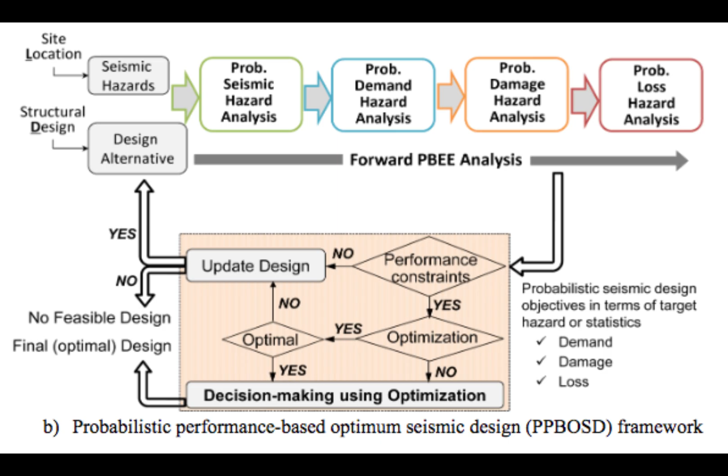But what we have now is the traditional code base, wherein the loads that we apply are from minimum or deterministic values, and also the strength capacity of our structural members. So under probabilistic design, we treat the loads, the resistance, and the hazard as random variables with distribution. So we apply the concepts or theories of probability.

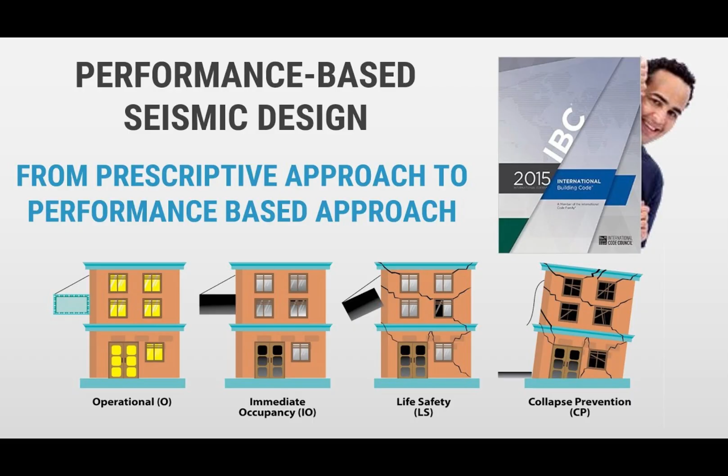Because in general, once we understand the hazards, the disasters, the loads that we apply to a structure, somehow it will give us some information on how much we should take into account those loads in our design so that we don't over design.

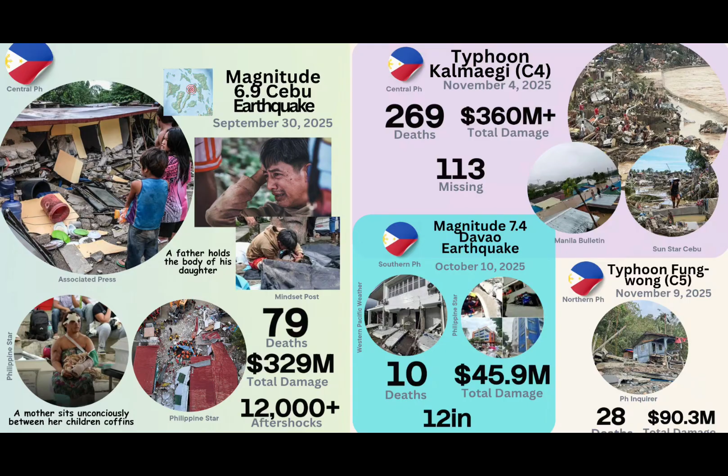We have many sources, references, and organizations that have their own lists of types of disasters. There's a global list of the different categories of disasters, and there's also a national list of disasters that occur in their specific region. But this one is according to the Emergency Events Database, or what we call EMDAT, and these are their classification, or 9 major types.

It includes drought, earthquake, extreme temperature, flood, mass movement wet or dry. There's also the classification of storms, which includes typhoons and hurricanes if we're talking about the Atlantic. And also wildfire and volcanic activity.

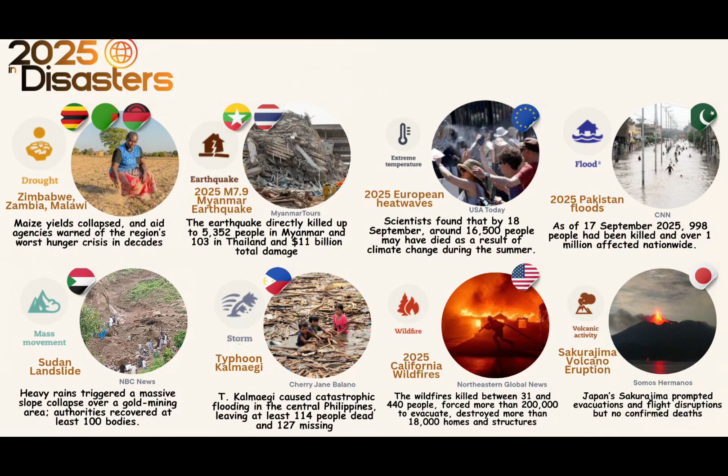Only events that cause at least 10 deaths are considered a major disaster or event according to them. And aside from at least 10 deaths, it needs to have affected 100 or more people, or triggered a state of emergency or international assistance, also included to qualify it as a disaster.

So how about the Philippines? We have a lot of natural disasters wherein there are many casualties and many affected. Although, it's not as significant compared to the superlatives found here. But of course, the Philippines is one of the countries with many occurrences of disasters under this data from EMDAT.

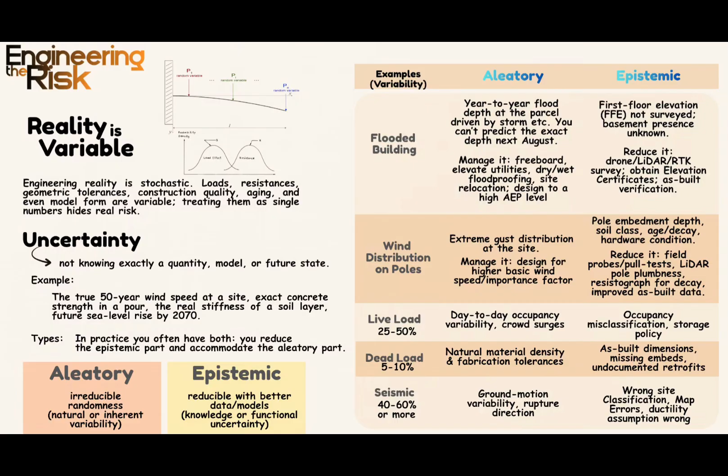Going to the specifics, now we can define uncertainty and we can relate uncertainty to the probability. And then uncertainty is related to risk. Now, since risk itself carries uncertainty, we are never fully sure or certain about the impact or the consequences of a hazard to an infrastructure, state, or asset.

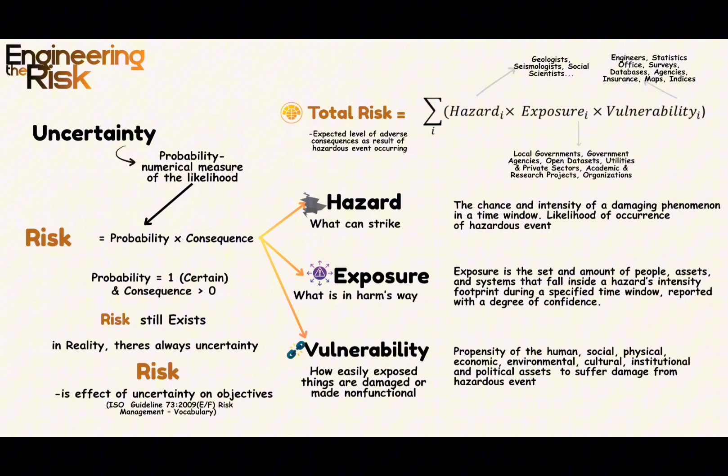Okay, so isa-isahin natin. The first one is hazards. And under this hazard sphere, we have this table. So, in order for us to obtain the hazard parameters or the intensity ng hazard na i-apply natin do sa pag-compute ng total risk, it's a process of understanding and extracting a data from different sources.

Like for example, for earthquake, kinukuha natin sa PHIVOLCS yung geographical or meteorological information ng isang area from PAGASA. So it involves a lot of process and data gathering. So may procedure tayo sa pag-identify or pag-describe ng isang hazard na pwedeng tumama dun sa isang area or sa infrastructure. So dito, meron lang tayong nilist doon na 4.

We have seismic, or we can say that this is the geophysical hazards, flooding, hydrological, strong winds, meteorological, and wildfires. So, yung 4 na to, I think very common siya sa US. And then, yung 3, common sa Pilipinas. And then, pwede pa nating ma-classify further or broken, pwede pa natin breakdown into more specific subtypes.

So, pag sinabi nating seismic hazard, may iba-iba pang classification na hazards na pwedeng mangyari kapag mayroon tayong fault line. Isa na doon yung rupture, yung ground shaking, and pwede din mag-cause yung earthquake na yun, yung center ng earthquake, pwede din siyang mag-cause ng tsunamis or liquefaction. Yun yung different further types ng hazards under geophysical or seismic hazards.

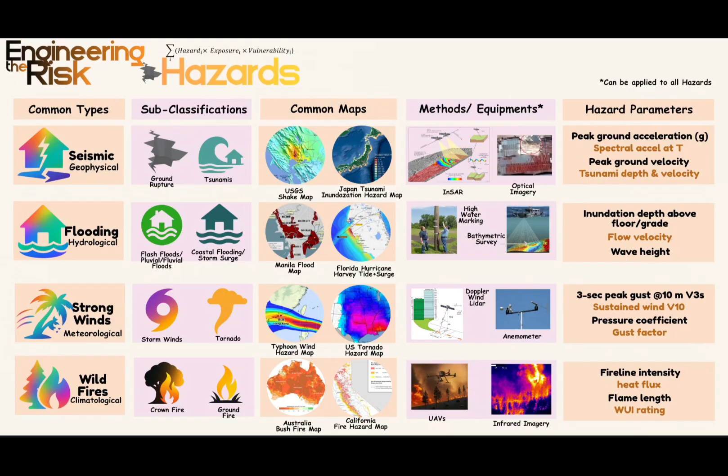Now, the exposure is the link between the hazard and its impact on the people or the building and infrastructure. Okay, so how do we describe exposure?

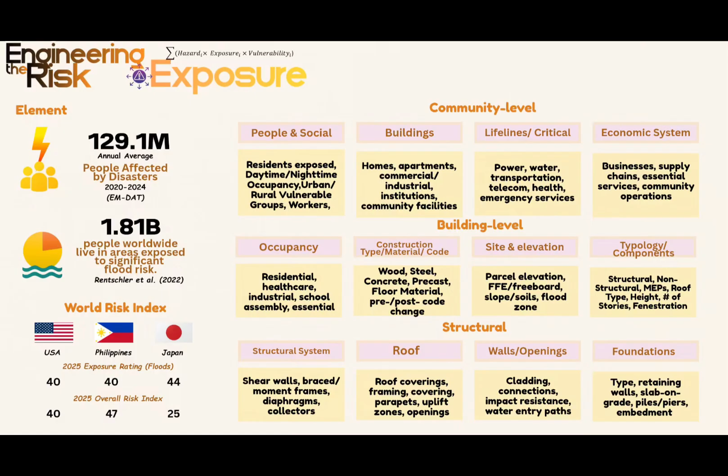The third one is vulnerability. And then we can also classify vulnerability into four categories.

So the first one is physical susceptibility - how easily an asset sustains physical damage for a given intensity. Whether that hazard can cause the structure to be destroyed.

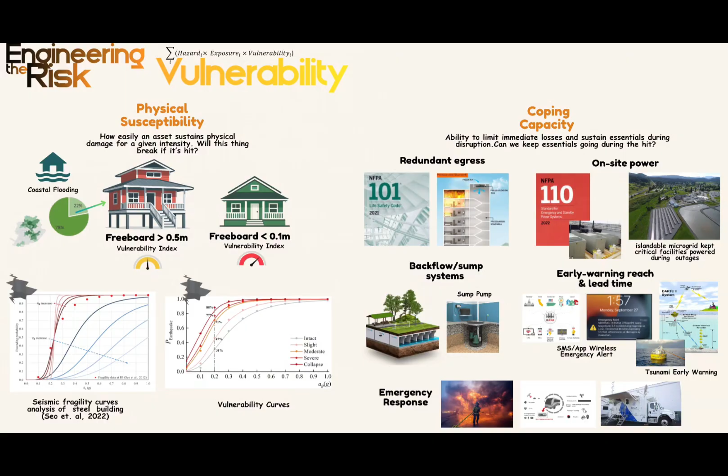Okay so the second one is coping capacity - during the event, yung adaptive capacity naman is for the next event. So combination na siya para mas ma-improve natin yung resiliency, yung physical susceptibility ng isang infrastructure.

Dito sa adaptive capacity, we consider yung pag-enforce ng codes, yung pag-retrofit ng structure, pag-proof against fire or flooding, and included din yung risk-informed land use planning and pag-relocate. So yun yung mga under adaptive capacity.

And the fourth one naman is yung interdependency in systemic vulnerability. So failures in modern communities propagate like dominoes. Kapag nasira yung transmission center, transmission tower, or yung electricity, may mga system na nakadepende doon.

So hindi na din siya gagana. May mga infrastructure tayo na nawawalan na din ng effect or ng function kapag may nasira na kung saan nakadepende siya doon sa nasira na yon. Kaya importante din, kapag community vulnerability yung pinag-usapan or network vulnerability, we need to consider this fourth type of vulnerability.

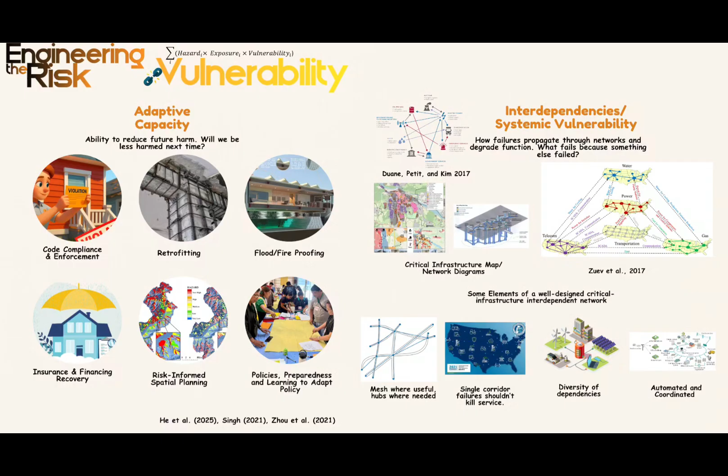So example lang ng pag-apply ng formula. Yung formula lang naman for risk, total risk is if meron kayong data for hazard, na intensity, and then na exposure and vulnerability, then you can obtain the total risk.

So for here, meron tayong example. The subject is we need to estimate the number of people likely to be affected or injured, included yung injured or yung ma-displace due to a building damage from specified seismic source.

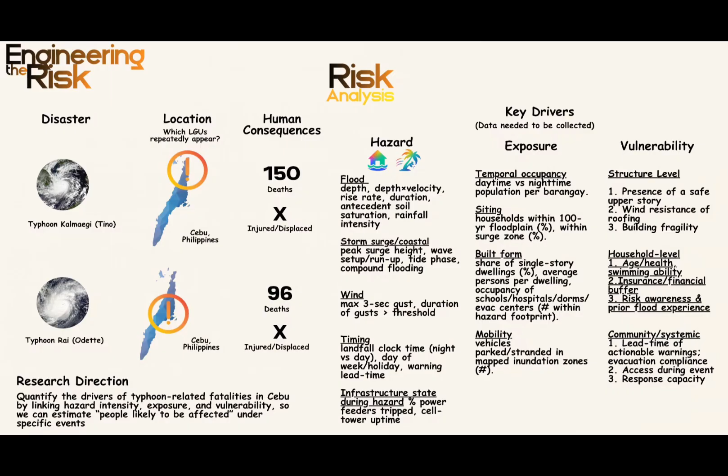Okay, so we can also, once na meron tayong information, meron na tayong risk assessment dun sa structure, meron na siyang level, may nag-designate na tayo ng level ng risk dun sa infrastructure na yun sa community, and dito naman mapupunta yung complete risk assessment. So in engineering, we adapt or we follow this internationally recognized standard.

Ito yung ISO 31000. So this is a guideline that continuously nag-improve because of the dynamics and the changes in the hazards. Mas naging intensify, kino-consider nyo din yung climate change. So it involves, it's a process.

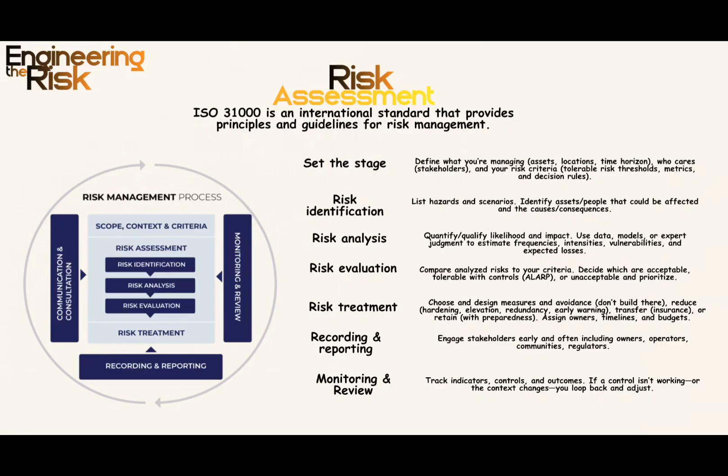So first, you need to define ano ba yung ina-assess ninyo. Is it an asset, a location, or a time horizon? So kasama yan sa scope, context, and criteria. At under risk assessment, kasama yung risk identification - nandun na yung list of hazard, risk analysis, risk evaluation, risk treatment. So yan yung typical process ng risk assessment.

Okay, so aside from that, meron tayong mga fields sa engineering, or minsan yung mga reliability engineering, parang courses lang siya or subjects na ino-offer sa iba't ibang fields, hindi lang sa civil engineering. Kasi lahat naman ng mga fields na hindi lang structure yung at risk - yung mga machines din can cause hazards, so can also involve yung mga risk doon sa mga machines na yan.

Ano pa ba yung iba't ibang fields na nag-offer sila ng mga courses na yon or subjects. Una yung reliability engineering, ino-offer din siya - it also being offered sa industrial engineering, sa systems engineering, or sa mechanical engineering. Pero dito sa atin sa civil engineering, hindi required yung reliability, nakasama lang siya sa probability, pero yung risk engineering kasama - sa construction, kasama yung risk engineering.

At meron pang isa, yung resilience engineering. Although yung resilience engineering, hindi naman talaga siya course na in-offer sa iba't ibang mga programs, pero under na din siya ng risk engineering. Pero mayroong isang school na nag-offer ng program na involved itong reliability or yung triple R - reliability, risk, and resilience engineering. So try nyo i-search sa internet, I think Vanderbilt University yung nag-offer ng course na to.

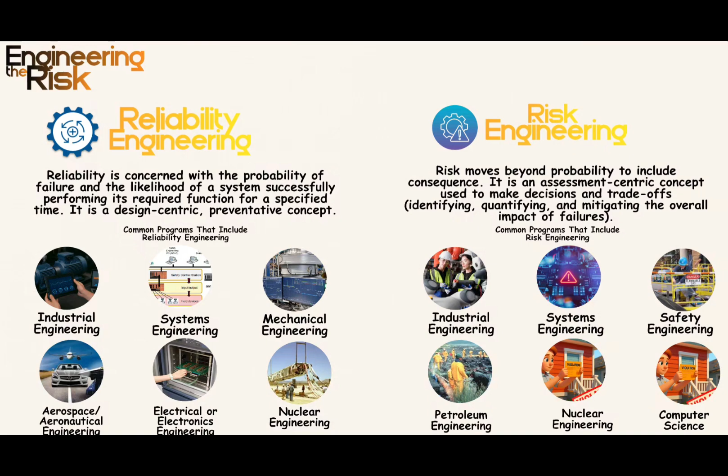Na sa risk engineering naman, it moves beyond probability and includes the consequence. So it's an assessment-centric concept used to make decisions. Meron na ditong decisions, ginagamit yung concept ng reliability, probability, para makapag-come up ng decisions and trade-offs.

At ang third concept, very important sa structural engineering. Now aside from identifying the probability or uncertainty na may possibility magkaroon ng risk, dito sa resilience, we also talk about these 4 R's - ito yung robustness, redundancy, resourcefulness, and rapidity. So yung robustness, it is mainly focused on the ability to resist of the load, so under siya ng physical susceptibility.

Redundancy is the presence of alternative components. So if for example merong landslide, of course pag may landslide, may masisirang mga poste ng kuryente and mawawalan ng kuryente. Pero kung meron kayong parang ibang source pa na hindi lang siya connected doon sa source na yan, hindi mawawalan ng kuryente yung isang area.

So there's like a backup, so the backup falls under redundancy. Resourcefulness is the system's ability to organize people, information, equipment, and money during and after a disaster. For example, when a storm hits, they already know who does damage assessment, who talks to LGUs, and the repair crews and emergency response team are already there.

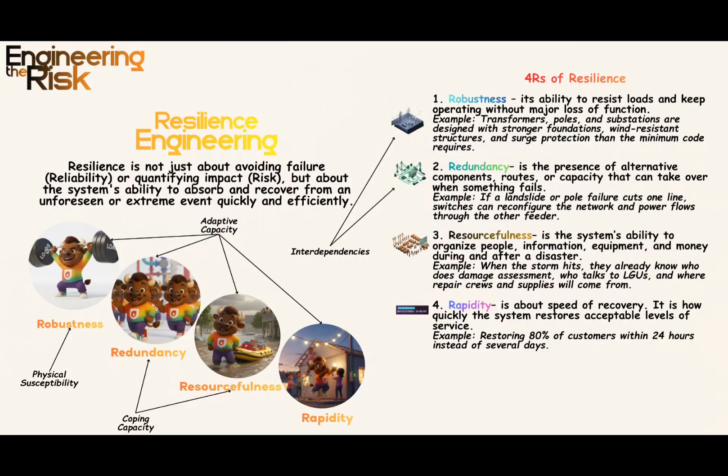In the US, we have what's called FEMA. They're the ones who apply and operate resilience. Their mission is to help people and infrastructure before, during, and after disasters, and of course they're involved in the whole resilience process.

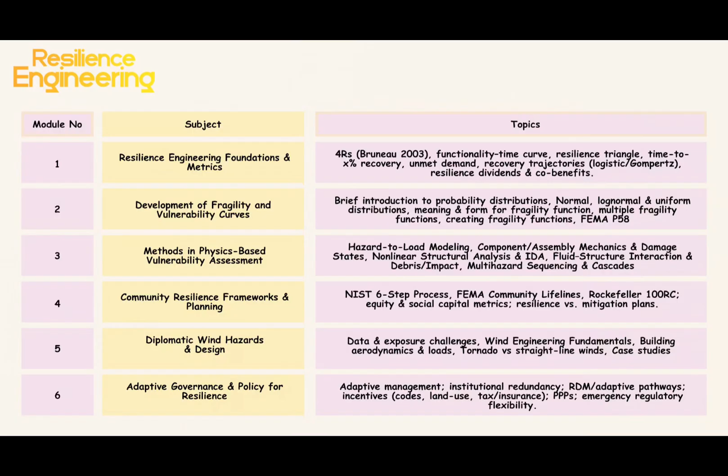If it's commonly structure fragility curves, or for buildings, there are different types of typologies. Okay, so when we say fragile, we can define it as easy to crack or shatter when dropped or bumped. So in engineering, we can apply this concept of fragility to assets.

The assets referred to here are buildings, bridges, power lines, industrial plants, ports, and hospitals. So this asset has some level of demand it can tolerate, and beyond that level - in our structure, the limit states - it can break in a particular way.

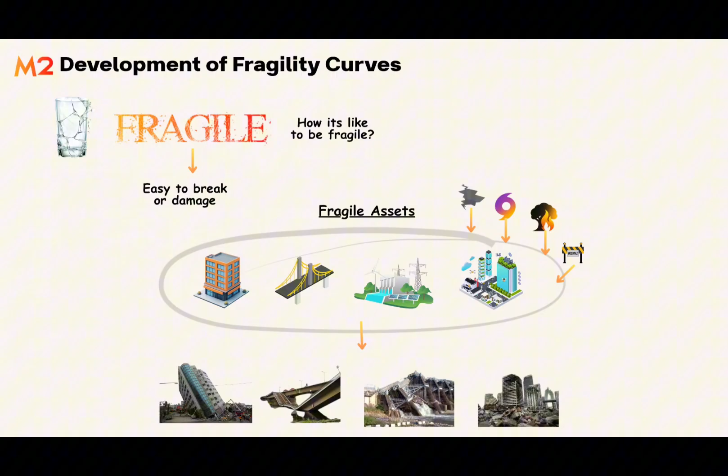So fragility, we can define this as the susceptibility or the physical susceptibility to damage. We can represent how weak our structure is using this concept of probability. And then that concept of probability is applied so we can come up with a function.

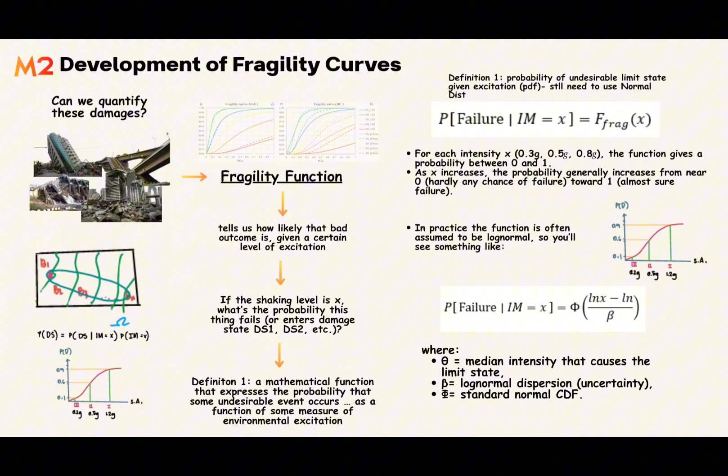This seems incomplete - ln x minus theta. So let's correct that: ln x minus theta over beta. Theta is the median intensity that causes the limit state. This is what you need to get from testing or research - what is the median intensity that causes the limit state, from different trials. Beta is the log normal dispersion or the uncertainty. And this is the standard normal CDF, to get the probability value.

The second definition is based on the cumulative distribution function. Under this, a fragility function represents the cumulative distribution function of the capacity of an asset to resist an undesirable limit state. So we can say that the capacity represents the IM level at which it just collapses.

So we can read this as: F, the fragility at a certain intensity, is equal to the probability that the capacity will be less than or equal to x. And the other one, with failure, can be read as the probability of failure given that the intensity measure equals x is the same as the probability that the capacity is less than or equal to x, which equals f, the fragility, f sub c of x. So those are our naming conventions for probability.

This is how the fragility function follows. So a simple example: suppose you have data from testing that gives you a median value of 0.8g - that's theta - and your beta is 0.4. So the fragility function is the probability of collapse - just plug in the values. Let's write and present again the formula or representation of the fragility function.

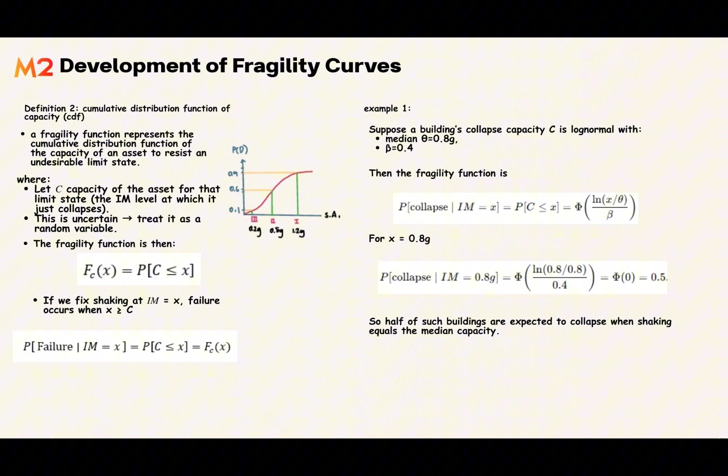Okay, so the general log normal fragility form, we can read this as: the fragility function for a damage state D, evaluated at X, is equal to the probability that the damage D is greater than or equal to little d, given that the intensity measure X, capital X, is equal to x.

And then the probability will be equal to this phi, and then the ratio of the natural logarithm of x over the median capacity, over beta d. So, yung mga units natin for theta, dapat same siya dun sa x. Yung theta is intensity din, and beta is the logarithmic standard deviation.

Now, yung term na may ito, yung P, the probability of D greater than or equal to d, given that capital X is equal to x, ito ay isang example ng conditional probability. Kaya nag-come up dito is nakabase siya dun sa conditional probability. I hope naalala nyo pa yung concept ng conditional probability. So, this one, P, the probability of A given B, this statement is true given that the statement B is true. So here, yung A is yung damage state exceeds D, at yung B is the excitation, X is equal to x.